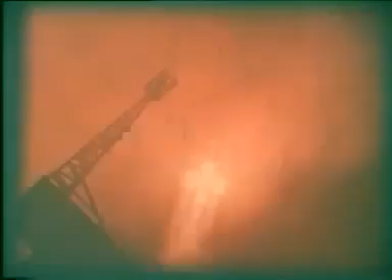Today, everyone knows the advantages of weld seams. They are durable, strong, efficient, and applied with metal structures of any size, shape, and purpose.

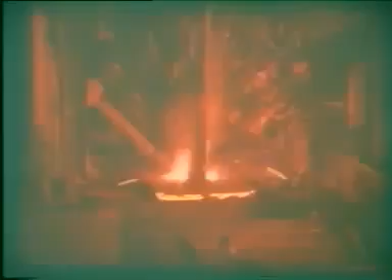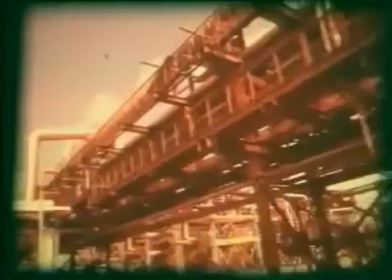Sometimes it is even hard to imagine that 100 years ago, there was no electric welding at all. The history of welding is rich with many interesting pages. This film shows the very first one, and probably one of the brighter pages of history. It is the story of Nikolai Nikolaevich Benardos.

At the roots of welding, it is the Ukrainian village of Mostovoye in Nikolaev region. 150 years ago, it was named Benardosivka, after the man who first settled down here, General Pantelimon Benardos.

In the famous Hermitage in Leningrad, there is a portrait of this valorous officer among those of other heroes of the 1812 war. As a boy, he fled to Russia from Greece, which then suffered from Turkish yoke. His son Nikolai left the village of Benardosivka when the boy grew old enough to join an artillery academy, and here his grandson, also Nikolai, was born in 1842.

Benardos the Jr. learned handicrafts here and was introduced to the wonderful world of technology in the local smithies and workshops, where all machinery was driven to action by transmission belts run by a fast and noisy river. Later, he took a short course in medicine at Kiev University, then studied in Moscow at Peter's Agricultural and Forestry Academy.

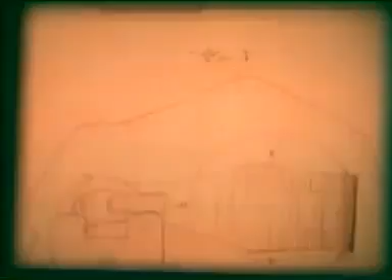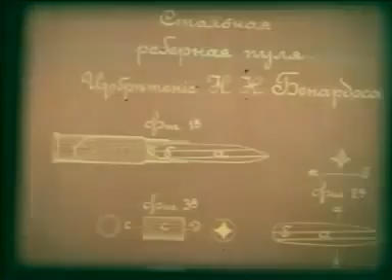We know at least more than 200 inventions and designs by Nikolai Benardos, ranging from faucets and storehouse locks to agricultural machinery and various devices. Transportation means, machine tools, fortification structures, and combat engineering, military and lighting equipment.

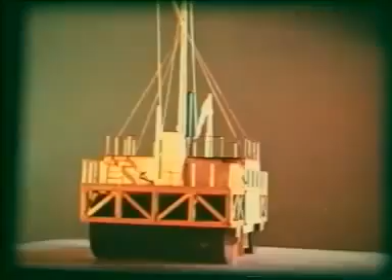One of the big projects realized in Lukha estate is the steamship that could go across sandbanks. The inventor himself took the ship along unnavigable rivers, all the way to the Volga, and then on through the Mariinsky Canal system to St. Petersburg.

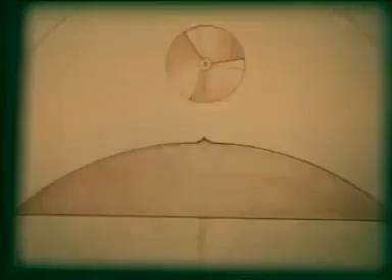Of course, many of those inventions have long become outdated, and compared to modern technologies, may even seem simply naive and funny sometimes. But Nikolai Benardos had one outstanding feature, which is so much characteristic of all great inventors. That is the ability to foresee far into the future. He was one of the first who started to work out a design of a flying machine, heavier than the air.

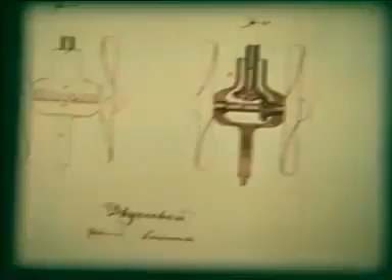Even by present standards, his ideas that underlie many propeller designs seem fresh and full of novelty today. The electric gun, which had been a complete utopia at his time, today may serve as a prototype for a would-be system of smooth launch of rockets in electromagnetic field.

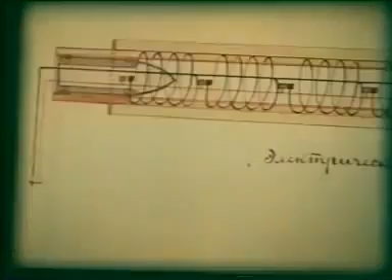This ordinary-looking album of sketches is a true insight into the future. Today, the method, similar to Benardos's electric culture, allows to grow plants in space, controlling their growth by electromagnetic forces.

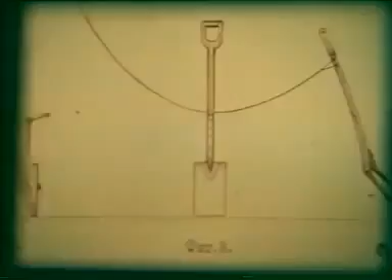And yet, Nikolai Benardos had still another, the major goal in his life. When he was still a student at the Peters Academy, the beginning inventor went for the 1867 World Exhibit in Paris.

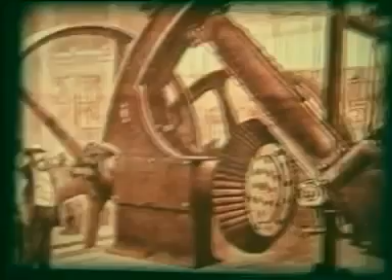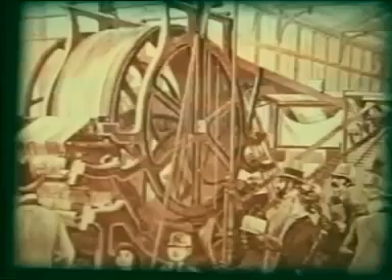Having seen the technological wonders of that time, Nikolai Benardos understood that the rapid growth of industry would inevitably have to stumble over the inadequate technique of fastening metals. The future needs of industry could be satisfied neither by primitive hammer welding, which was unreliable and could handle only small parts, nor by riveting, which was labor-consuming and inefficient in cases of repair.

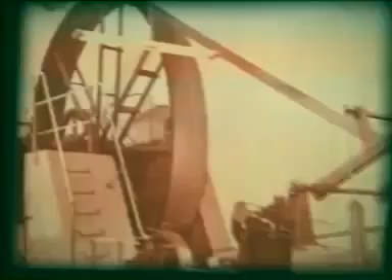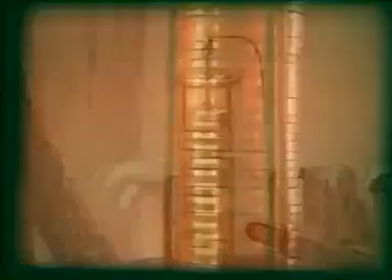The inventor based the solution of this problem entirely on the possibilities of electricity. Back in 1802, in a laboratory of St. Petersburg Medical and Surgery Academy, the Russian physicist Vasily Petrov experimented with a Galvani-Volta battery and discovered the electric arc. While replacing charcoal by different substances, Vasily Petrov found out that the arc does smelt metal.

70 years later, electric arc was again used in the Yablochkov candle. Put on a glass bulb, it was used to illuminate capital cities in many countries.

During his visit to France in 1876, Nikolai Benardos witnessed a real triumph of the Russian light, as the Yablochkov candle was called by surprised citizens of Paris. His Paris impressions and a personal meeting with Yablochkov seemed to give new impetus to the young inventor.

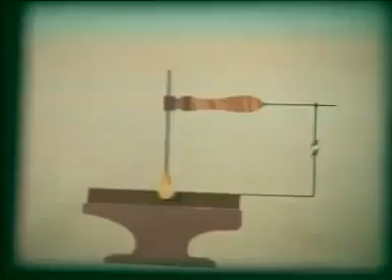Long before that, in Lukh, he tried to apply electric arc for heating the metals. An attempt to turn a heated part into one of the electrodes in the arc was crowned with success.

Now the question was, can it replace the hammering entirely? But specialists were unanimous in saying no, it was impossible to use arc for soldering or welding. The inventor decided to search for the right answer.

Nikolai Benardos went to St. Petersburg, to Yablochkov's factory, where the inventor of the arc lighting worked together with outstanding Russian experts in electric engineering, Alexander Ladygin and Vladimir Chikolev. At the Russian Technical Society, Nikolai Benardos created several original projects in the field of electric engineering.

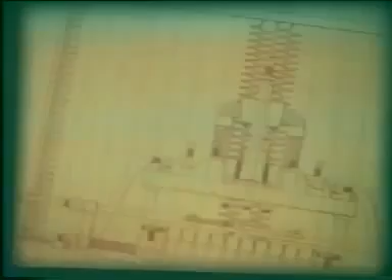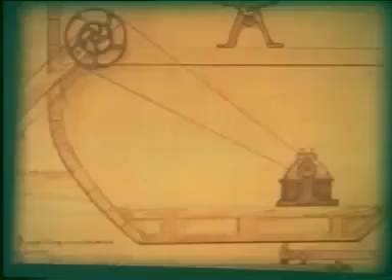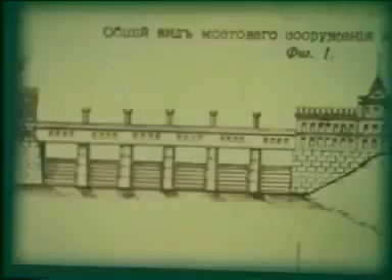At the same time, he makes new steps toward his major goal. The inventor designed a special welding storage battery and discovered the elements for the welding circuit.

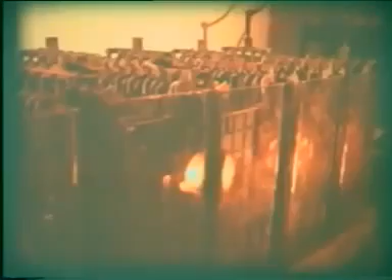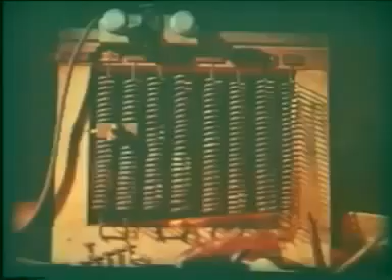Having selected a storage battery as the most preferable source of current at that time, the inventor used a weak current generator for recharging the battery, and also completed the system with a loading regulator and a commutator. At the same time, he patented several successful models of regulators and commutators.

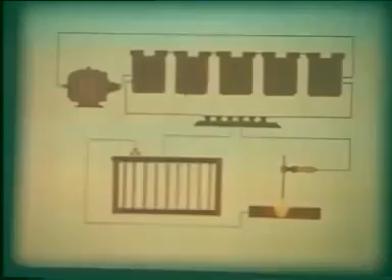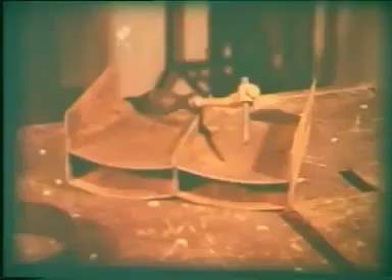Late in the 1870s, the basic design of the electric circuit and all components of welding were completed. The estate in Lukh turns into an electric welding workshop.

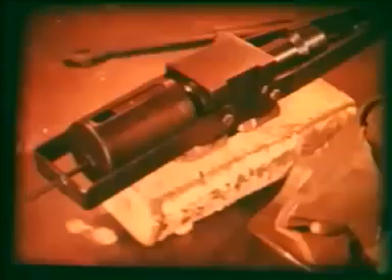Even though the first welding equipment looked like a forging anvil, the main thing was already done. The inventor succeeded to obtain a solid weld seam.

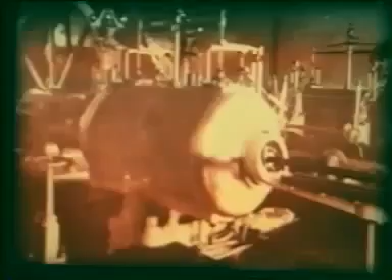During his experiments, the inventor found the first reliable type of welding bath protection and the way to obtain a quality weld. The welding was done by a long arc with a white torch on the so-called reverse polarity. This resulted in strong reducing reactions, which prevented the oxidation of metals.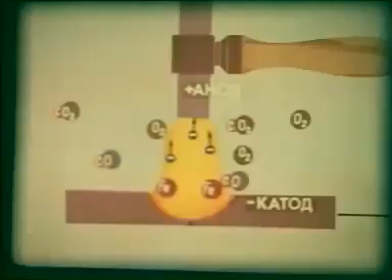Here's Paris again, the laboratory of the Russian electrical engineer Kubot. The La Nature magazine wrote about those days the following: the electrical processing of metals. This research was begun in 1881.

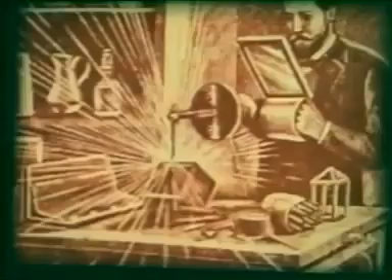Mr. Benardos was the first to apply this method in the Electrocien laboratory for autogenous welding of lead plates for storage batteries.

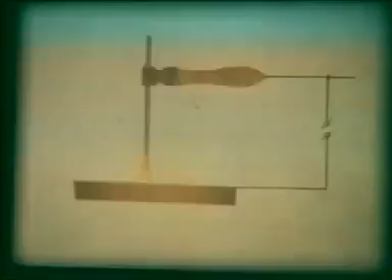In the list of major inventions and projects for 1881, Nikolai Benardos made entry number 46, which read Electric Hephaestus, the Greek name of Vulcan. It was the first name of the electric welding. The method, which was named after the ancient god of blacksmiths, was destined to become a true conqueror of metals.

The invention of electric welding was not only a scientific feat, but also a deed of life for Nikolai Benardos. In this building in the old Kineshma Bank, his estate in Lucha was sold for debts. In 1884, it was the price of many years of expensive experiments before the invention was made.

The selling of the estate was a total bankruptcy for the Benardos family, while the electrohephaestus still had to be legalized. Money, money and more money. He needed loads of it in order to get a patent in Tsarist Russia.

And he still had to go through petitions, verdicts, and references by experts, decisions, and more petitions. Only in 1885, Nikolai Benardos could finally get a patent for the electrohephaestus in France. A little while later, he got a patent in Russia.

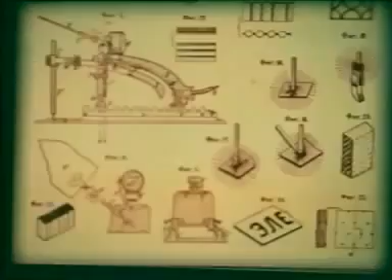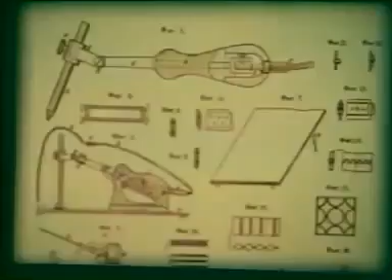In his formal description of the device, Nikolai Benardos wrote the following: this method allows to unite separate metal parts, to separate or cut metals, to drill holes and make cavities, and also perform overlap welding. Now industry received an unheard of method of processing metals.

The inventor actively advertised the new method, and in 1885 he managed to organize the Electrohephaestus Society in St. Petersburg.

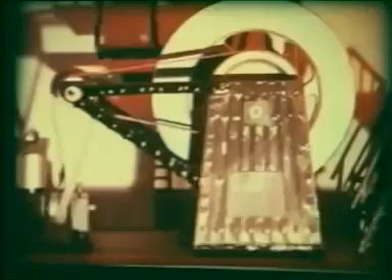Unfortunately, this model of the world's first welding workshop, reconstructed from old sketches, cannot recreate the atmosphere of continued search that reigned at this works. Every new weld was a discovery in itself, something that had no precedent.

Locomotive wheels and frames, pipes and boilers, welding equipment and parts of ship hulls, all this was made and repaired reliably and quickly here.

The Electrohephaestus was not only a workshop, but also a laboratory where the inventor realized his daring technical ideas.

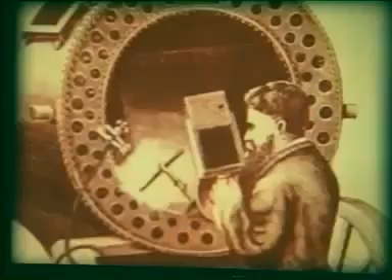An expert welder himself, Nikolai Benardos soon introduced a welding technology not only for steel, but also for pig iron, copper, and bronze.

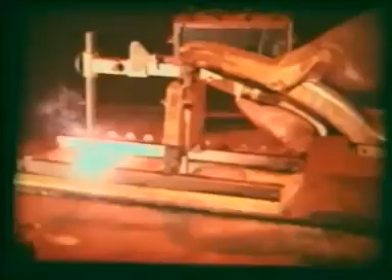While working on various types of welded joints, the inventor designed many original devices and electrode supports for manual and semi-automatic welding.

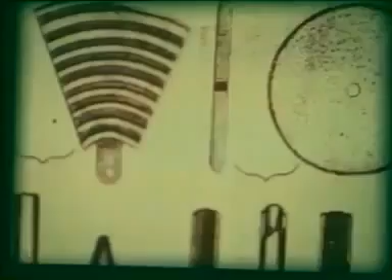Electrodes of special shape and design, such as tube electrode filled with powder flux, help to raise labor efficiency and facilitate arc excitation while welding in difficult conditions.

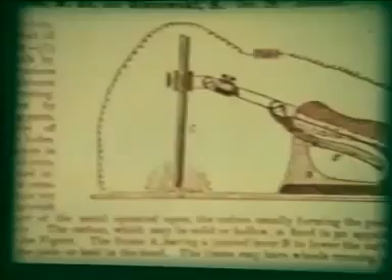The Electrohephaestus and its follow-up equipment and processes were licensed in the United States of America, Britain, France, Germany, Belgium, Sweden, Italy, Norway, Denmark, Spain, Switzerland.

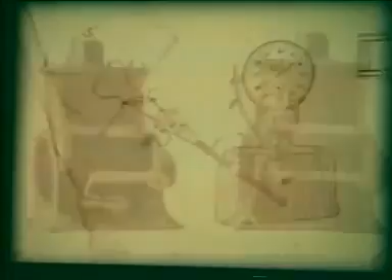Dozens of plants in those countries began to open and successfully operate welding stations, and even large workshops, which applied the Benardos method and sometimes received direct assistance and advice from the inventor himself.

There appeared first textbooks and manuals on electric welding, which were based entirely on the theory and experience developed by Nikolai Benardos.

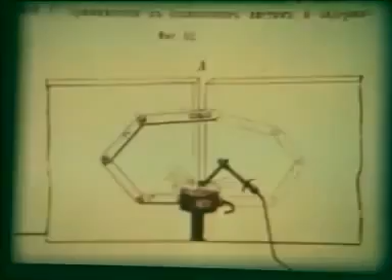His inventions were displayed in special halls at various technical exhibitions. He was awarded the gold medal of the Russian Technical Society for the successful application of the electric arc. Along with the inventor of radio Popov and electric lamp Ladygin, Nikolai Benardos received the diploma of Honored Electrical Engineer.

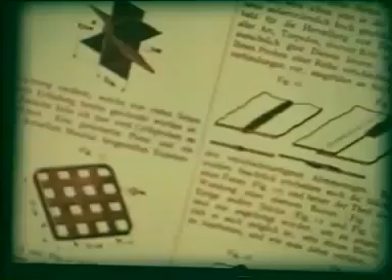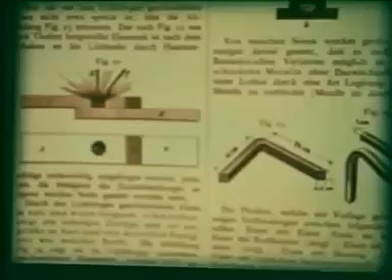In his articles and reports, the well-known German physicist Riemann underlined that the invention by Nikolai Benardos shall go down in the history of engineering, on par with the invention of the steam engine, telegraph, telephone, electric lighting, and transmission of electric energy at long distances. Leading technical journals devoted dozens of articles to Nikolai Benardos. Like Yablochkov's Russian light, the Russian arc by Petrov and Benardos excited the whole world.

World renown was soon gained by another Russian engineer, Slavyanov, who successfully experimented with replacing coal electrodes by metallic ones.

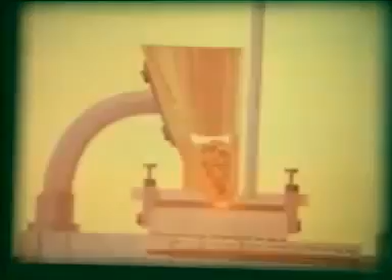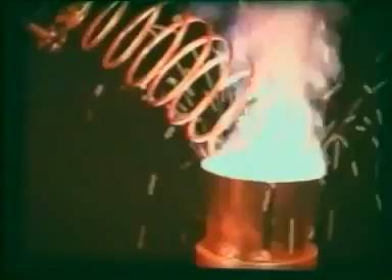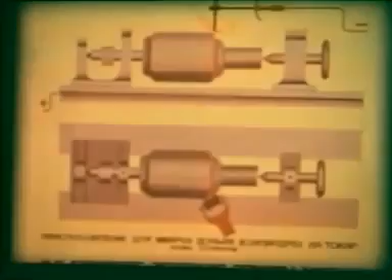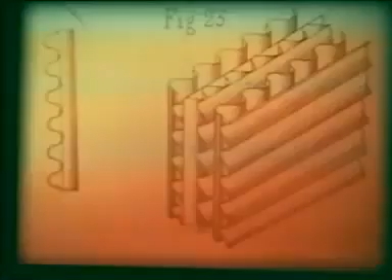With the use of welding methods, Nikolai Benardos obtained super-strong porous armor. It was an invention that was well in advance of the development of technical thought. This is the inventor's personal seal. Experts think that today this welded structure can be made only through the use of plasmic or electronic beam welding. And still, Nikolai Benardos did it with a plain, ordinary coal electrode.

Inspired by his success, the inventor decided to implement his old dream. With the help of electric welding, he wanted to restore the Russian national relic, the giant Tsar bell, and to hear how it did sound.

For many years, he kept this plan in mind and carried out numerous experiments. The elaborate project included the whole complex of restoration work, from the transportation of the bell, its hoisting by hydraulic jacks, and the construction of a grandiose Tsar belfry. The welding itself was to be carried out in a specially built heating furnace. The Tsarist government merely disregarded this talented idea. It was the end of more than just an old dream in the inventor's life.

Nikolai Benardos went broke again after investing all his property into experiments without getting any financial support from anywhere. In Tsarist Russia, with its landlordish atmosphere of stagnation, the Electrohephaestus Society had no chances for survival and fell to pieces. The next to sink down was the Russian Society for the Electrical Processing of Metals. In the prime of renown and with no means of living whatsoever, many great Russian inventors had to live through the same, almost ritual trial as Nikolai Benardos.

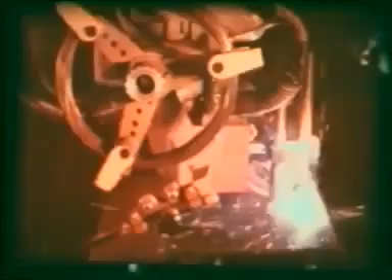Soviet scientists, engineers, and working men have realized the most daring dreams of Benardos and Slavyanov. The true center of welding in the world is now the Institute of Electric Welding under the Ukrainian Academy of Sciences. It bears the name of the outstanding follower of the first Russian welding experts, Yevgeny Oskarovich Paton.

The reality today are age-long dreams of lonely enthusiasts who wished to conquer the forces of metal and replace strenuous manual labor.

Every weld, today and tomorrow, will remind us of the heart and thoughts of Nikolai Nikolaevich Benardos, the man who stood at the roots of welding.